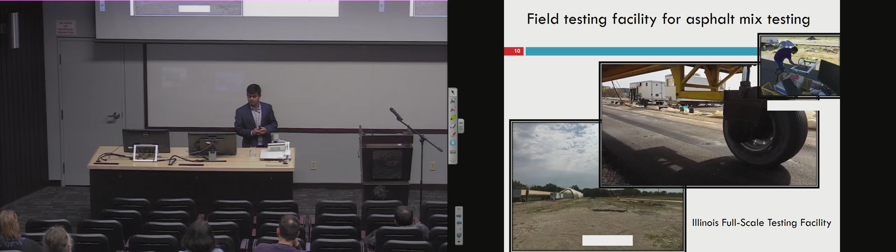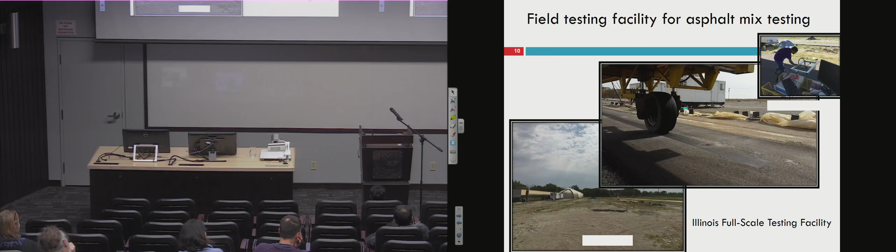So basically, after characterizing the mixture in the lab, you create the road section, a small pavement section, then you apply this artificial loading to see the rutting or other cracking issues in a little bit of a real world context before you do big projects.

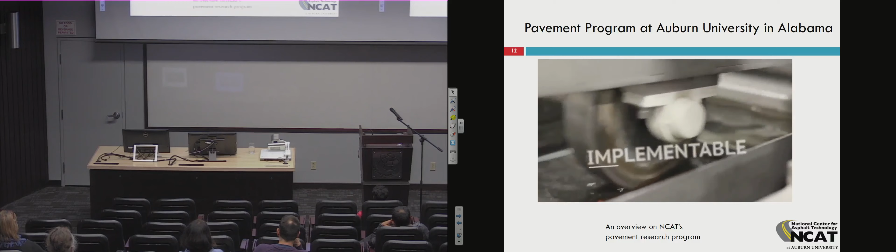America relies on our highway infrastructure. For over 3 decades, our National Center for Asphalt Technology at Auburn University has focused on improving our roadways by evaluating and developing new technologies to make our roads smoother, quieter, safer, longer lasting, and more economical. NCAT was established through a partnership between Auburn University and the National Asphalt Pavement Association. We take pride in our strong relationships with state transportation departments, contractors, and others involved in the asphalt pavement industry. We strive to provide practical research results that are relevant and implementable into practice. Our highly qualified engineers understand pavement performance every step of the way, from the laboratory to the field. We are also developing the next generation of industry leaders.

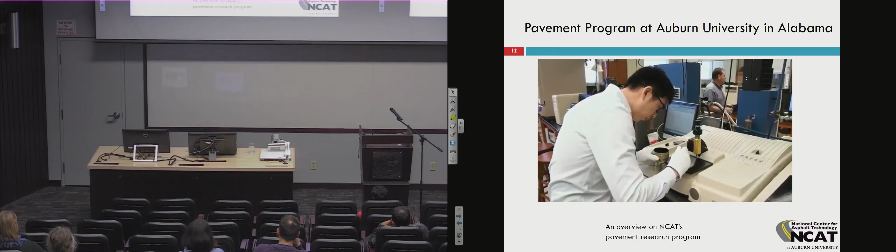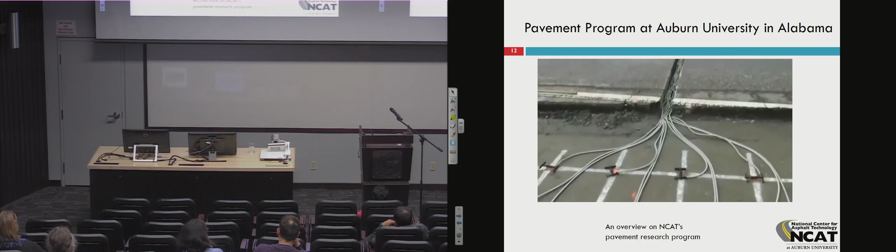Students have the opportunity to obtain practical research experience, and many former NCAT Road Scholars are now in key infrastructure positions around the world. The NCAT Test Track is the only facility that combines real-world pavement construction with accelerated loading using heavy truck traffic. Highway agencies and industry sponsors fund research on the 1.7-mile oval, where our fleet applies over a decade of interstate-type traffic in only 2 years. Structural test sections have embedded strain and pressure sensors to measure pavement response to loads for validation of mechanistic empirical design procedures. Performance is monitored on a continuous basis to evaluate rutting, cracking, texture, friction, and noise.

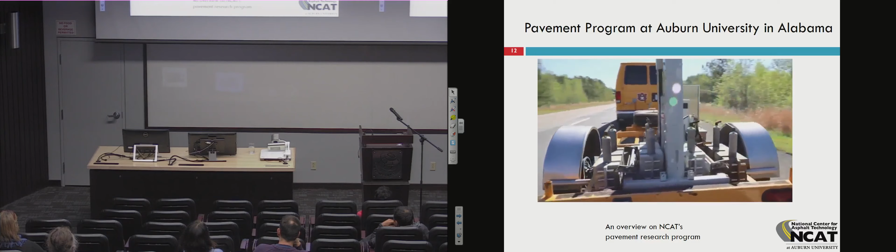So when I say that every state university develops a partnership with the Department of Transportation, it doesn't mean that every university has this facility, but in each region they have a field test facility, so they can really simulate or obtain the environmental condition that is needed for that region.

So in Canada, in other provinces, we have good to decent programs. Again, the main universities in the province have that kind of facility. So in Ontario, Waterloo, Queens, and Carleton have good pavement programs with all the facilities. So the Ministry of Transportation Ontario has a good program. They provide up to $1 to $1.5 million for doing pavement and transportation research. So they can provide the necessary knowledge and information that is needed for their road network.

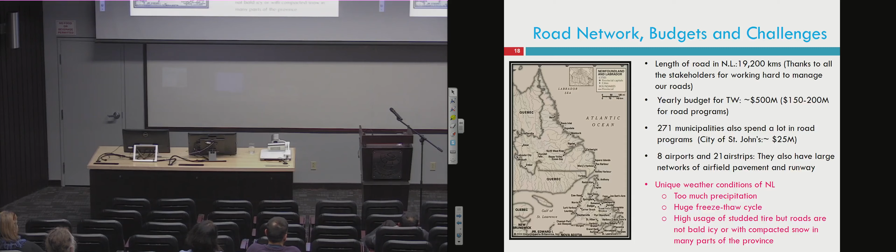So after I came here, I started to review the documents that are available in the public domain, like our specs book, and also we have a good friend in the Department of Transportation. I took the updated spec from them. I reviewed them. Of course, not in detail, but I saw the key features in the specification. So still, we are a little bit behind on asphalt mixture design.

We are not the only province that is following a 1940s method for mix characterization, that is the Marshall method. The main problem with this is it does not do the rutting test. It does not do any cracking test. That's why people started to use the Superpave system, that is a 1990 system. So 7 provinces use this system. And in the States, all 50 states use the Superpave system.

We specify Superpave binder, that's a good thing, but to my knowledge, I did not find a Superpave binder testing system in our province for testing for my student project. As I said, Raihan, my master's student, worked on binder characterization. So he needed to send the sample to Ontario for Superpave testing. Because our industry needs to, I think, create capacity to do more rigorous testing, although it's in our specification book.

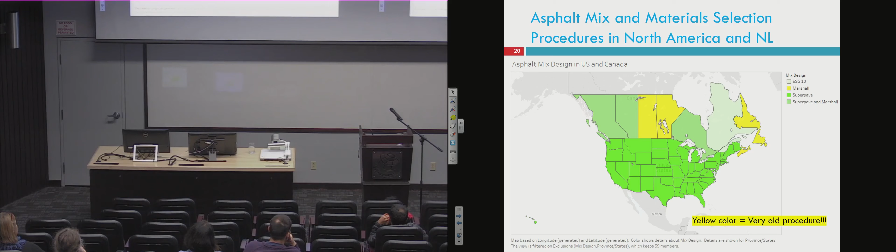So then I also saw a document online from the Auditor General Office. They also found huge issues in our road construction, specification, and management, the points I mentioned. So we really need to do something together. I do not want to repeat this. It's an online document you can review. It's called the Newfoundland Auditor General Report on Roadworks.

And my student did a survey, very small scale. We randomly surveyed about 20 roads and collected some distress data. So we found ruts are one of the major physical issues in our roads. Some related to studs, most likely. Some related to asphalt mix design, again, most likely. And some related to binder selection, the liquid portion of the mixture.

And we also have a lot of water-related damage, moisture-induced damage, that is potholes and raveling. Again, as I said, water is every day in Newfoundland, okay? It's just the form that is different. Then extreme freeze cycles, that also creates cracks in our pavement from the thermal stress.

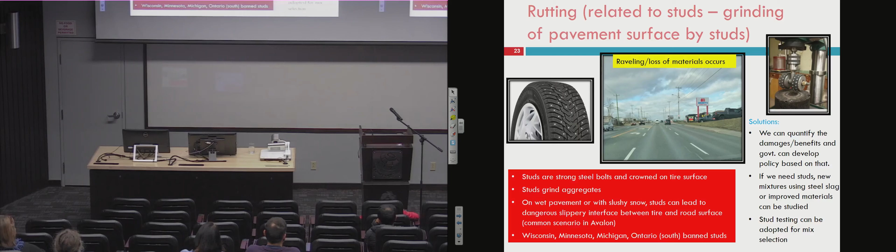Not only that, we need to also introduce stud testing, and we need to adopt that at the contractor level also, if we really need studs here.

And rutting is related to pavement or asphalt mixture design, or asphalt binder related. So when you drive on city roads, you will see rutted channels. It's like a tram line: the wheel path is depressed, and on the side you will see kind of humping or bulging. So that is occurring due to issues in the mixture.

If you have a lot of voids in your mixture, with the traffic loading it densifies. Or if your gradation design of the aggregate is not correct, you will see shear failure in your pavement. So this kind of distress occurs when you have issues in your gradation design, or if you have more voids than the optimal void.

And of course, it's related to aging also. If you do not estimate traffic loading for the design life, you will also see this kind of premature failure. But I do not doubt that aspect, because we do not have that much traffic in our province, although it's increased significantly in the last 10 years. I'm skipping the consequence part, so you are all aware of the consequences of rutting and potholes in our transportation system.

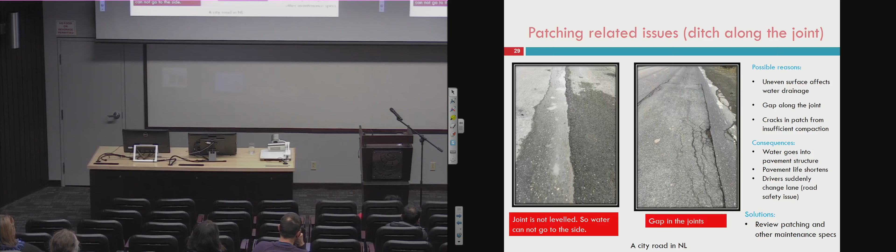Longitudinal cracking. If joint construction is not properly done and low compaction occurs, you will see a longitudinal crack between the joint because of the stress concentration from the low compaction in the joint. So again, it's a construction issue. It can also be introduced from top-down fatigue cracking. Again, we need to properly characterize the material to reduce these kinds of issues.

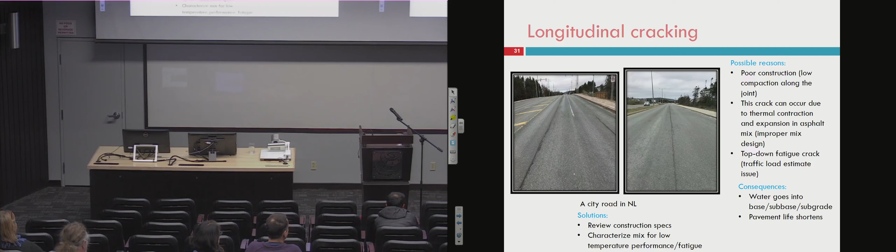They helped us do the performance analysis, and the result was really very bad news for us. All the cracking will be further deteriorated by climate change, including rutting in the asphalt layer, rutting in the base layer, rutting in the sub-base layer, and the fatigue-related cracking. I shared this result with the Director of Construction in Transportation and Works recently. This is a recent result, and we will also present this research this coming January in Washington at the Transportation Research Board Conference.

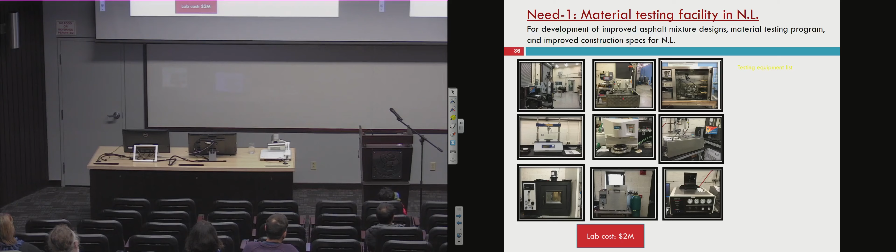For this, we really need to characterize the material using state-of-the-art facilities and testing systems. To my knowledge, we do not have advanced equipment, at least we do not have access. So we need to develop a central lab in the province that everybody can use: government engineers, municipal engineers, contractors, some kind of model we need to establish. And of course, my students and researchers also need to use it. And we need some highways and streets for road testing, so we can collect the data, and the data can tell what we can do and what we cannot do.

And this is a little further thought. Say we have rutting as a major issue in our roads, so I feel like we need to collect field cores from different regions, different cities, different highways, and then do in-depth analysis of those field cores, whether it is occurring in the asphalt layer. If it is the asphalt layer, we need to tune the asphalt grade. We probably need to introduce polymer if it is the issue.

And if it is in the mixture design, we need to work with the gradation structure. And if it is in the subgrade, we need to come up with a subgrade solution, but that is less likely because we are situated on strong metamorphic rock. So probably subgrade is not the major issue for most of our roads.

And for the water-related issues, we want to try surface drainage improvement, slope improvement, and also using some modifier to enhance the adhesion between the aggregate and binder. And again, I want to have field test sections where I have a control section, improved slope, improved binder, or other mixture designs like porous pavement, and see which system performs better in our context.

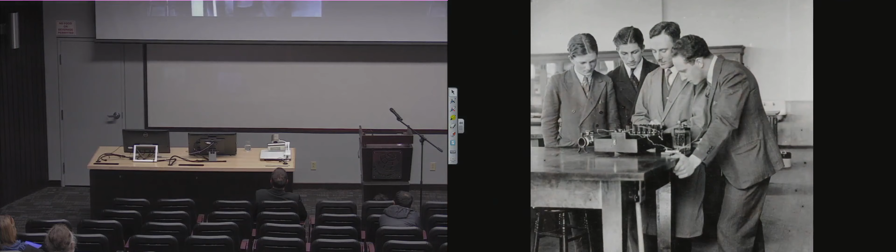Engineering and Applied Science at Memorial University has a rich tradition of excellence in engineering education that dates back to the 1930s. For the first 40 years, a 3-year diploma program in engineering was offered, with graduates of the program moving on to other institutions to complete their degree. All that changed in 1969 when Memorial University offered its own degree-granting cooperative engineering program in 3 disciplines: civil, mechanical, and electrical engineering, as well as a Master of Engineering in the field of ocean engineering.

I think the biggest thing that we noticed was the broader range of faculty that were all of a sudden available. Before 1969, when the program really started, there were only maybe 7 or 8 faculty in the whole engineering school, and they handled all the different courses. And I think my classmates were a little bit envious of the ability to study at home in Newfoundland the whole way through, and the fact that it was a co-op program, which we didn't have. And I think the co-op program was a major step forward in providing a much more rounded and versatile education.

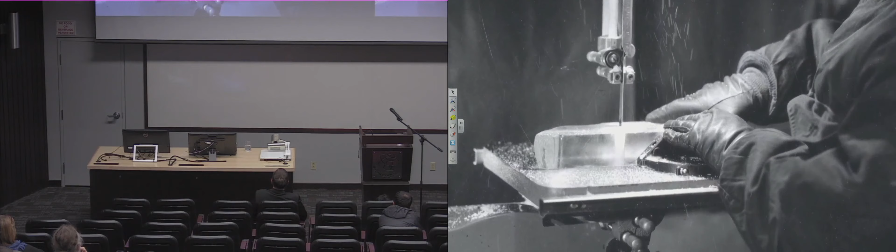My first impression of the engineering program was that I was starting a brand new program. They had a previous program, a well-respected program, 3 years at MUN. After that, you'd move off to places like Dalhousie to complete the degree. We were in a brand new program. Great promise.

It was a co-op program that attracted a lot of us, but there was also a sense of great change and newness. Many of the profs were new profs, and not only to Memorial, but to being a professor as well. And practically every class, it was the first class that they taught on that subject. But the idea of being able to graduate from a co-op program, to get that experience along the way and help pay the bills along the way, made a big difference to a lot of us. And it was very important to be part of that program.

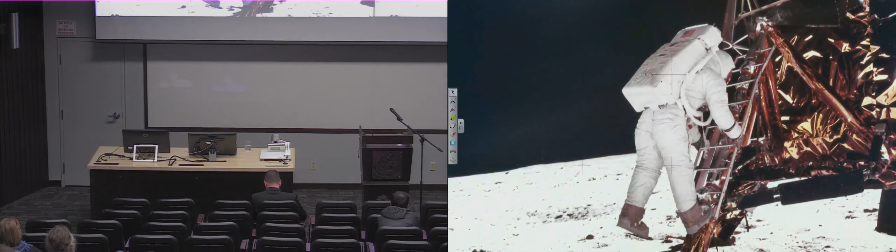When we started the engineering faculty, it's interesting to know that was 50 years ago, and around that year there was the moon landing. So there was a great deal of interest in space, and we were starting a new faculty, and we couldn't go into space. So we were thinking, well, what is Newfoundland? What space is important? It's the ocean. Dr. Angus Bruneau was the first dean, and the faculty, we had discussions. We decided ocean engineering was going to be our main thrust of research.

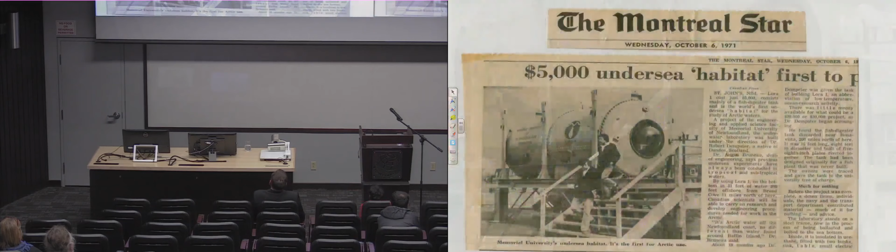That was our space. The ocean research of the 1970s led to projects involving iceberg towing and LORA, the low-temperature ocean research activity, a cylindrical laboratory for conducting underwater research. These types of projects in turn helped to contribute to the development of the province's offshore oil industry. By the mid-1970s, C-CORE and Nordco were established. The NRC was relocated from Ottawa, and St. John's was well underway to becoming the hub for cold ocean research and development.

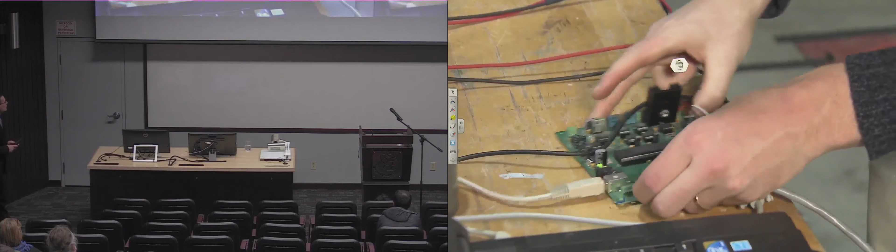Over the years, the Faculty of Engineering and Applied Science has had a tremendous impact on the social and economic sectors of the province. Our Faculty of Engineering and Applied Science has made so many major contributions and impacts on the province of Newfoundland and Labrador. Not only our current students through co-op education, and our professors in the research that they're doing, but also the accomplishments of our alumni, of whom we are so proud.

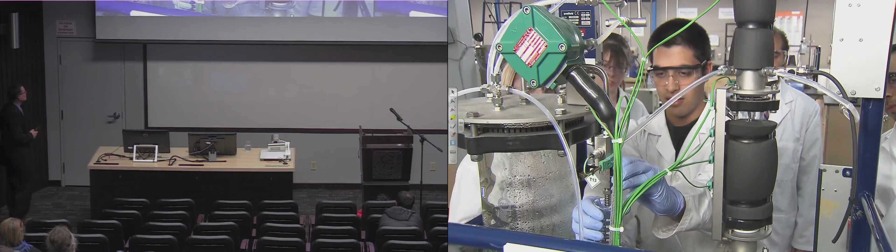Many have gone on to build industries and companies in this province, whether it's the offshore oil and gas industry or the high-tech sector. We have entrepreneurs that have started companies and have been leaders at companies. They've built the economy and contributed to the prosperity that we're seeing here today, and our wonderful standard of living in the province.